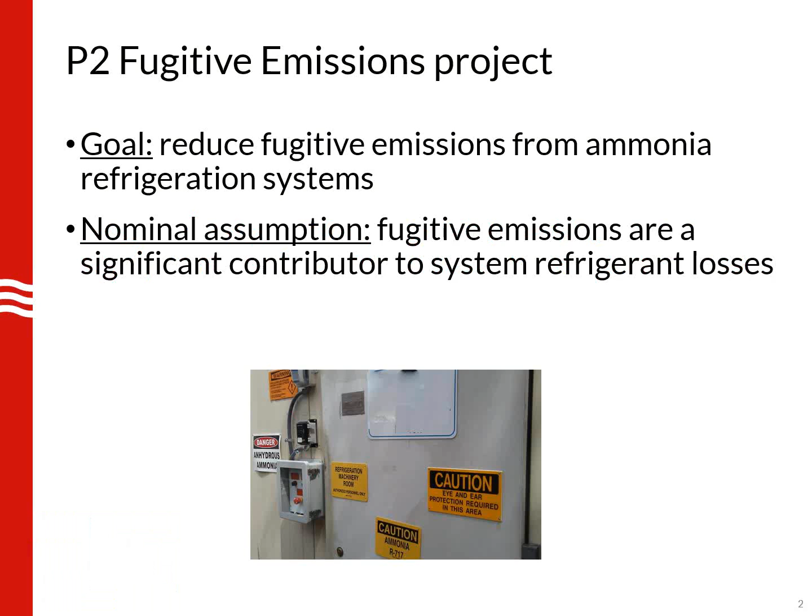We had a pretty simple goal at the outset of this project, and that was to reduce fugitive emissions from ammonia refrigeration systems. Our nominal assumption in establishing that goal was really pretty simple. We believe that fugitive emissions collectively were a significant component of the refrigerant losses that these systems experience on an ongoing basis. So that was what we might call our null hypothesis.

During the course of the project, we had several steps or phases in the work. The first thing was to establish some consistent guidelines for determining the refrigerant inventory for these systems. A lot of times the losses are expressed as a percentage of the refrigeration system's operating charge, or the inventory of refrigerant in these systems. Unlike a smaller refrigeration system that has an easily metered amount of refrigerant that goes in to allow the system to operate, it's not so easy when you get into these large refrigeration systems. I'll illustrate that as we get into the presentation.

We then moved to the laboratory phase of the effort. We wanted to evaluate different sorts of technologies that potentially could be used to identify where refrigerant emissions may be occurring from these systems. Then in the laboratory, we quantified what sort of leak rates we could measure in order to be confident when we went out into the field, which was the next phase of the project.

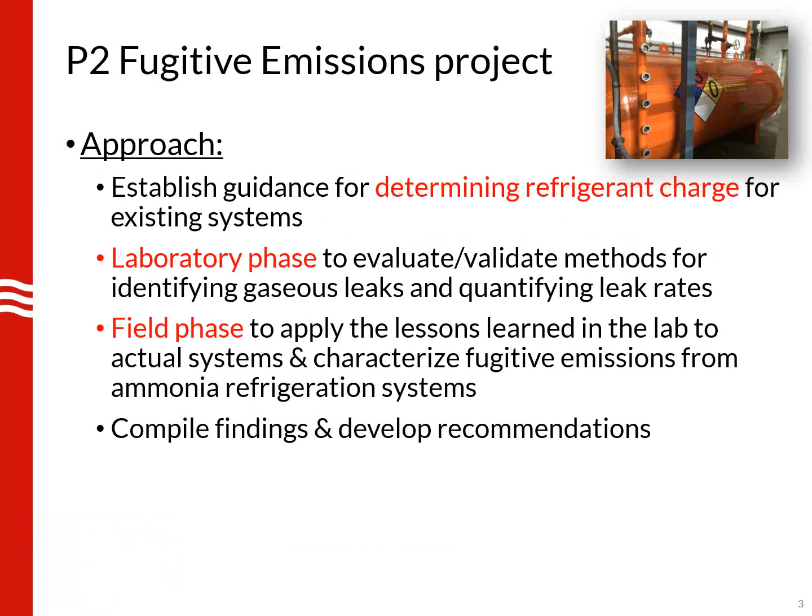We visited 5 facilities as part of this effort. We baselined the inventory of their refrigeration systems, and then we did a number of plant visits to identify and quantify fugitive emissions of refrigerant for those systems, as well as evaluating purchases for the past 3 to 5 years for each facility in order to try to match up the field data we collected on fugitive emissions with their actual consumption of refrigerant, and then compiling the findings and recommendations that we'll share, most of which with you today.

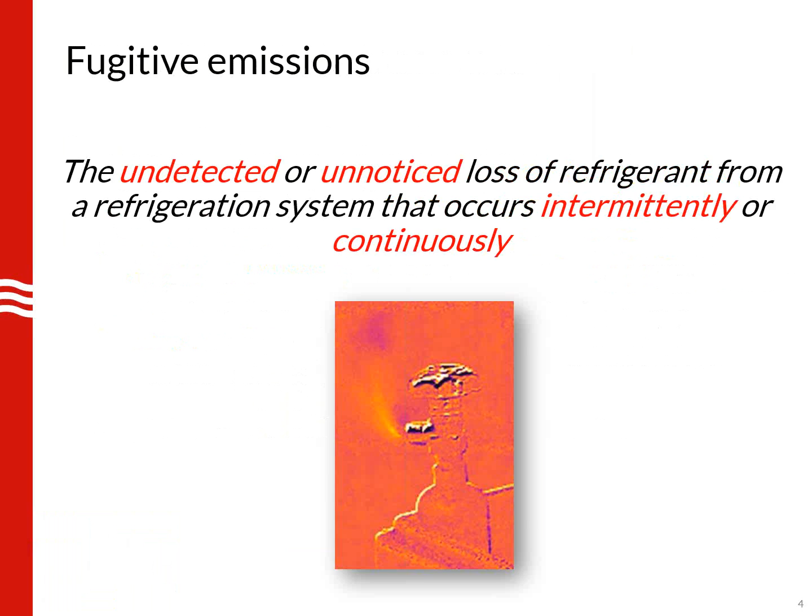So just to kind of level set, fugitive emissions are defined as those unnoticed or undetected refrigerant losses from these systems that can occur either on an intermittent basis or on a continuous basis. So that's a bit on the project and kind of what our goal and intent was.

Let's talk a little bit about the background. I know we have a pretty diverse audience here, so I want to give you a little bit of a sense of the background of the technology.

What is typical of refrigerant emissions. I found the survey results that a number of you responded to sort of interesting, so I'll show you that data. I'll touch briefly on how we establish what the operating inventory is for these systems, then we'll get into what strategies you can apply to reduce emissions and findings from our field work, and finish up with conclusions and recommendations.

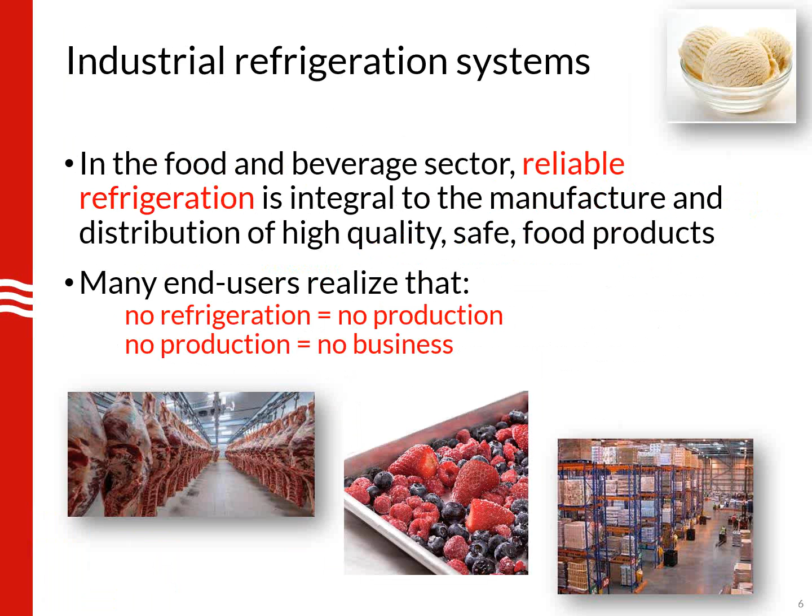In industrial refrigeration, the food and beverage sector really relies on refrigeration as part of their business. It's what I call the number one unlisted ingredient in food products. The end users that manufacture or store these products rely on refrigeration, and they realize that if they don't have refrigeration, they can't manufacture product, they can't package it, they can't store it, they can't distribute it, and all of that leads to no business.

So they value the reliability and safety of this infrastructure, and need it as a lifeline in their business. In the industrial refrigeration world, the refrigerant used by and large is anhydrous ammonia. There's a number of reasons for that. It's historical, it's been used for a long time. That was one of the first refrigerants used in the industry, and they never looked back.

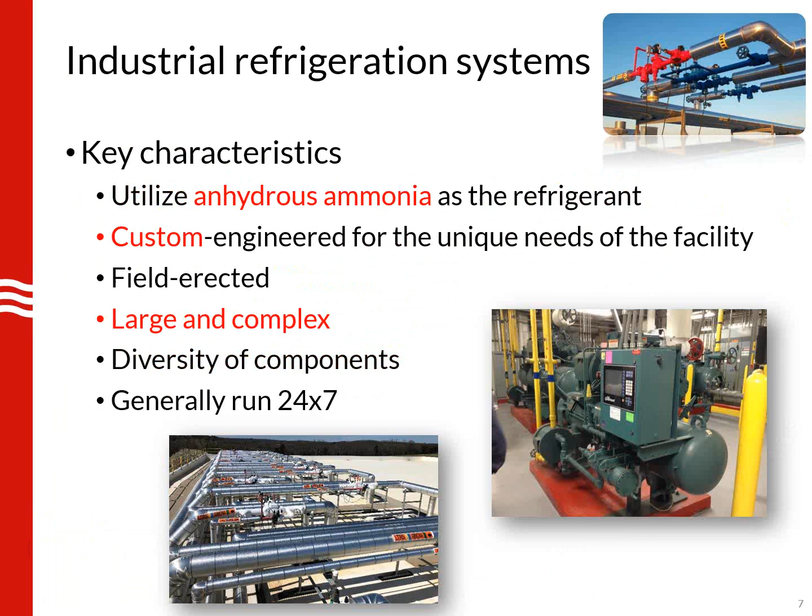These systems are custom engineered, which presents a number of challenges, and also makes it incredibly interesting. They're engineered for the specific needs of the facility, the process needs, the temperature needs for their manufacturing operations and storage. So these are all one-off systems, not something easily packaged and built in a factory and shipped to the job site. These are all field erected, large and fairly complex systems, with a lot of different components, and they run 24/7, 365. They virtually never shut down, because everybody needs to eat.

So why is ammonia used? We have a lot of different refrigerants that could be used in air conditioning and other types of refrigeration applications, but ammonia is ubiquitous in food production and storage because it's a really good refrigerant. It's efficient, has good thermodynamic properties, the cost of the refrigerant itself is low, and it's been recognized in the last 10 years or so that it has some very nice environmental attributes. It has no ozone depletion potential and no global warming potential.

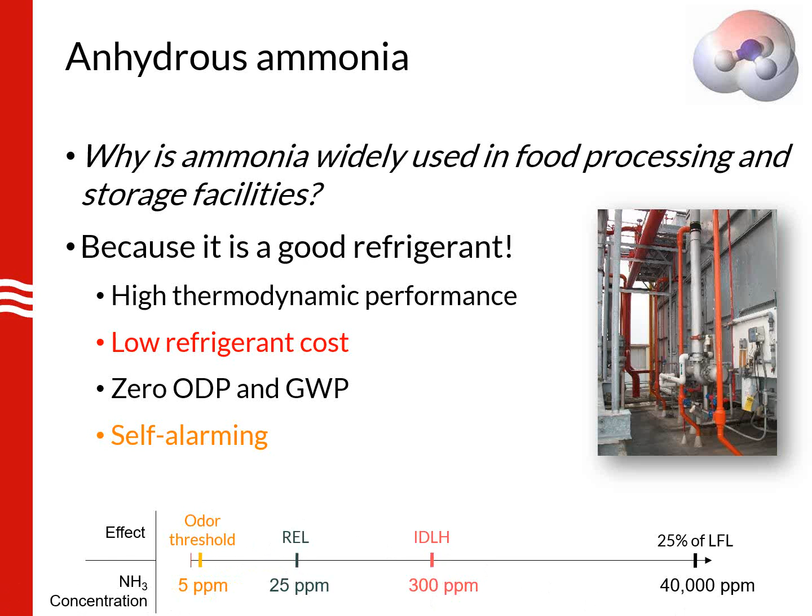Another hidden feature used in this project, and that some plants use, is that it's what we call self-alarming. What does that mean? That means you can smell it easily. Most people can detect the presence of ammonia at pretty low concentrations. It has an odor threshold of about 5 parts per million. Once you get up to about 25 parts per million, that's equivalent to NIOSH's recommended exposure limit. At higher concentrations, 300 parts per million is immediately dangerous to life and health. And at significantly higher concentrations, 40,000 parts per million is 25% of the lower flammability limit. So a pretty low concentration, and most people can sense that it's there.

So the scale of this infrastructure, in terms of how much ammonia circulates through the piping and all the components in these systems, varies really widely. We have small process systems and small applications like ice rinks that might use ammonia systems containing 500 pounds or less of refrigerant, maybe up to about 1,500 or 2,000 pounds.

Small to mid-size food or beverage processors might have systems approaching this benchmark of 10,000 pounds, which is a point of transition from a regulatory perspective, moving them into coverage by OSHA's Process Safety Management and EPA's Risk Management Plan programs. And you start getting into medium size food and beverage, which might be 10,000 up to about 60,000 pounds, including some modest size to large size refrigerated warehouses and distribution centers.

And then you get into the large and mega refrigerated distribution facilities. Those are in the range of 60 to 70,000 pounds, in excess of 100,000, 125,000 pounds. And then you get up into the very large process systems that can go above 500,000 pounds of ammonia in one system.

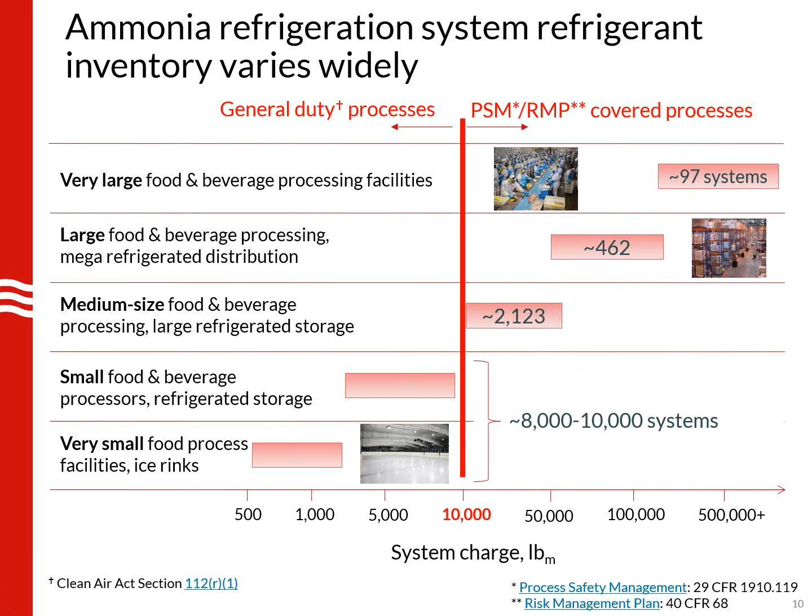The smaller systems that are below 10,000 pounds, there's no compelling filing requirement, so we don't have a very good count. Industry estimates there's somewhere in the range of 8 to 10,000 of these systems that are below that 10,000 pound threshold.

To give you an idea of the scale in terms of quantity of refrigerant used in these systems, let me touch briefly on a poll I sent out Monday asking people what they think would be a typical loss rate from these systems on an annual basis - what percentage of that system charge is typical. I gave you choices: 1%, 5%, 10%, 20%, and 30%. I know it's a diverse audience, so some of you may not be at all familiar with this, so I put in 'I have no idea.'

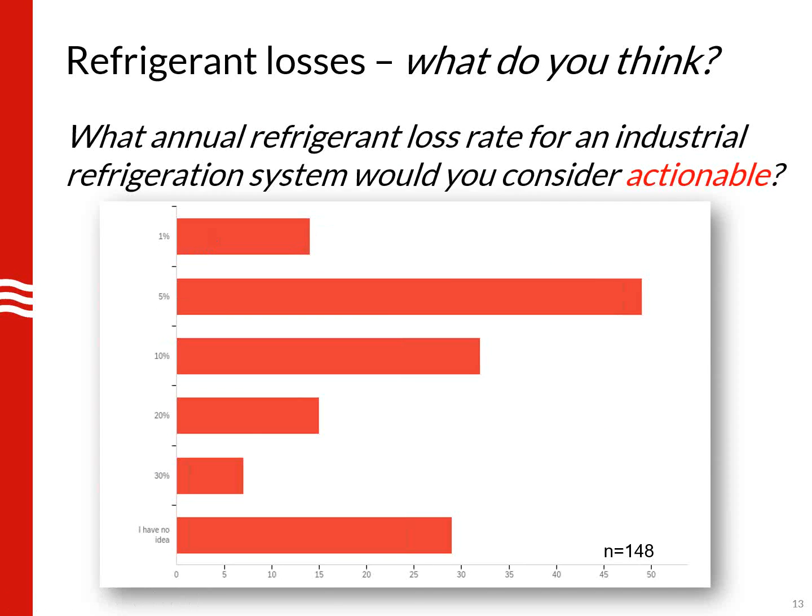This is what was interesting - I asked what would be a threshold for plants to take action if they exceed that limit. So if I'm losing more than X% of my system charge annually, are we going to get out and look for where the ammonia is going? What was interesting is you said the typical was 1% and the actionable was 5% of the system charge. So I guess the optimist in you collectively said we're doing better than actionable, right? If we're at 1% typical, no action required. Hold that thought, because we'll come back to that at the end of our presentation.

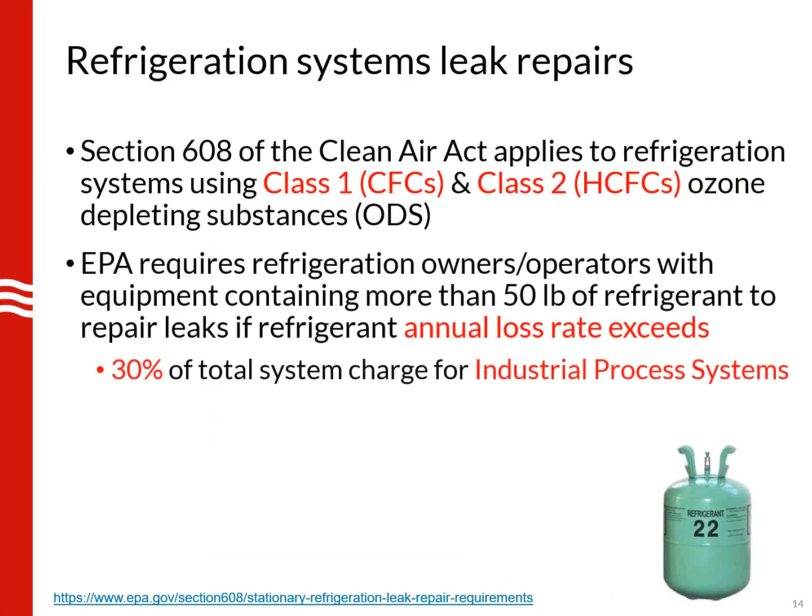To give you a basis for comparison, EPA Section 608, part of the Clean Air Act, governs what we call Class 1 and Class 2 refrigerants - these are ozone depleting substances. Any system that has 50 pounds or more of refrigerant and has annual loss rates that exceed these limits: industrial systems, 30% is the limit. EPA said if you exceed that threshold, you must go find and repair leaks. So think about that, 30%. For commercial systems it's 20% - these would be found in supermarket refrigeration applications. And for all others like air conditioning systems, it's 10%.

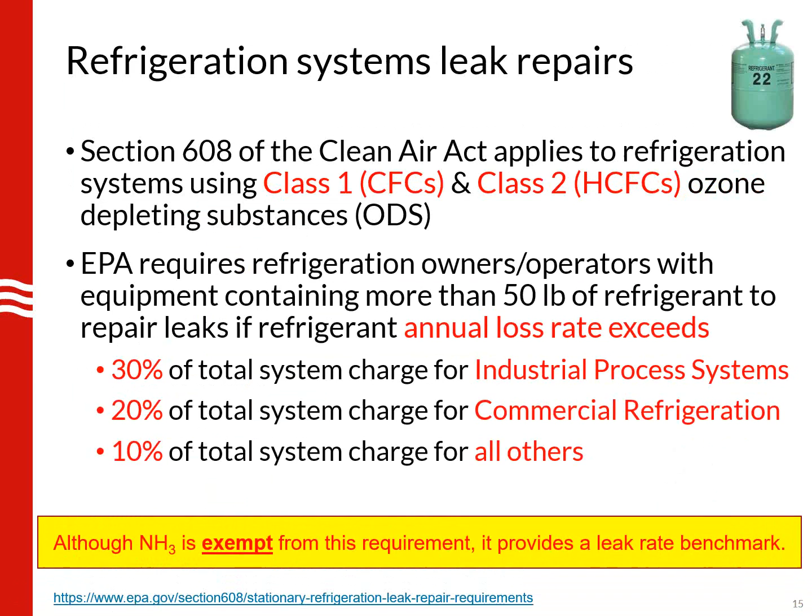But what's interesting is these only apply to ozone depleting substances. Ammonia is not an ozone depleting substance, so it's exempt from these requirements. The only reason we raise it is because this sets a bar at 30%. So if we had ammonia systems leaking at 30% as a routine matter, that would be a much different picture, and I think it doesn't match up with your instincts either.

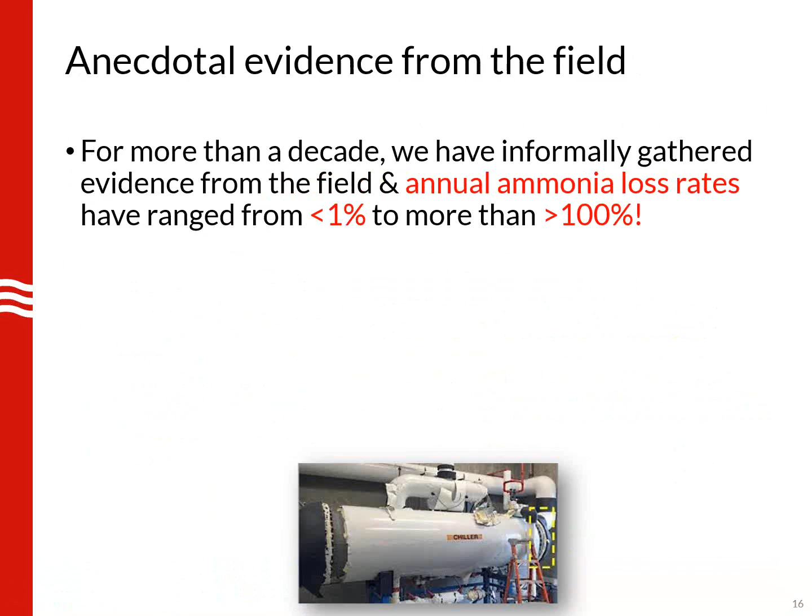Over the course of many years - we've been at this for a long time - we've seen plants that have leak rates of less than 1% per year, and we've seen plants that have had leak rates of more than 100% per year. That really was what drove us to pursue this project. We said, why is that range so wide? Where are these losses coming from? Is it fugitive emissions of ammonia driving this?

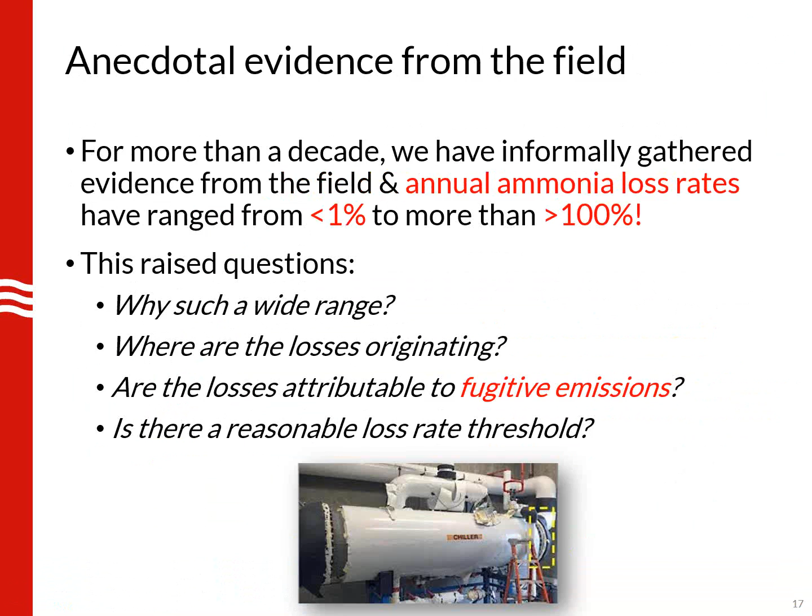What is a reasonable loss threshold, since there is no compulsory requirement from a regulatory perspective, like there was in Section 608 for ozone depleting substances. So the first step in this process is really baselining what is the operating charge or inventory of ammonia in a built-up refrigeration system for a given system. There are three general ways we can go at this.

One is we can do the engineering calculations, knowing all of the components that comprise the system and the state of the refrigerant in those components. We can go through and add things up, each component at a time, doing engineering calculations. That's what we did in this project.

We could also look at, if it's a new plant and they bring in ammonia and charge the system, we can add up the receipts for a new facility, but a lot of these facilities have been operating for years, in some cases decades, so we don't necessarily have that.

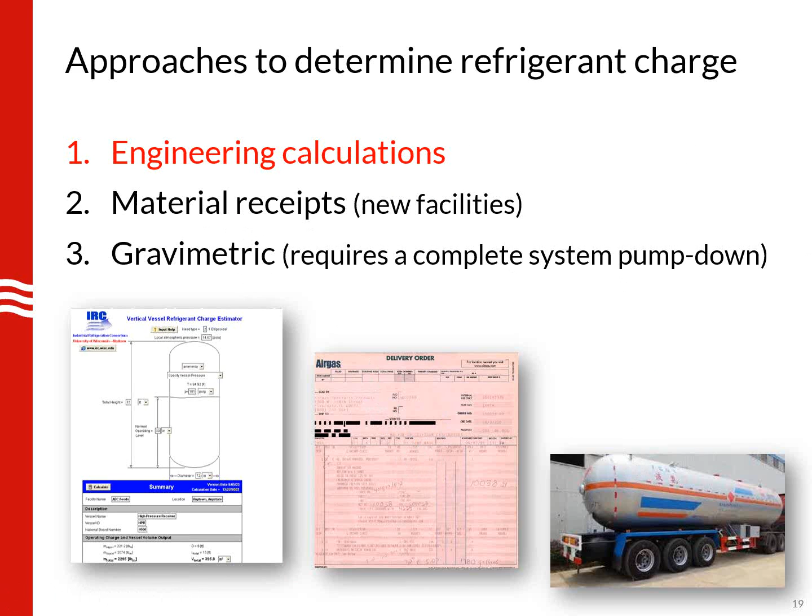You're not going to pump down a 500,000-pound system. It's going to take you a long time to get enough trucks, and you can't do it. So we're going to do the engineering calculations, and to do that, we evaluate the system, look at all the components, establish what the state of ammonia is in those components, knowing the properties of ammonia, the volume of those components.

We can multiply the liquid volume times the density. Liquid's the most important—it's the most dense fluid. Vapor is going to be fairly minimal in terms of its quantity. We sum up all of the individual mass of ammonia in each part of the system, and we arrive at a total system charge quantity.

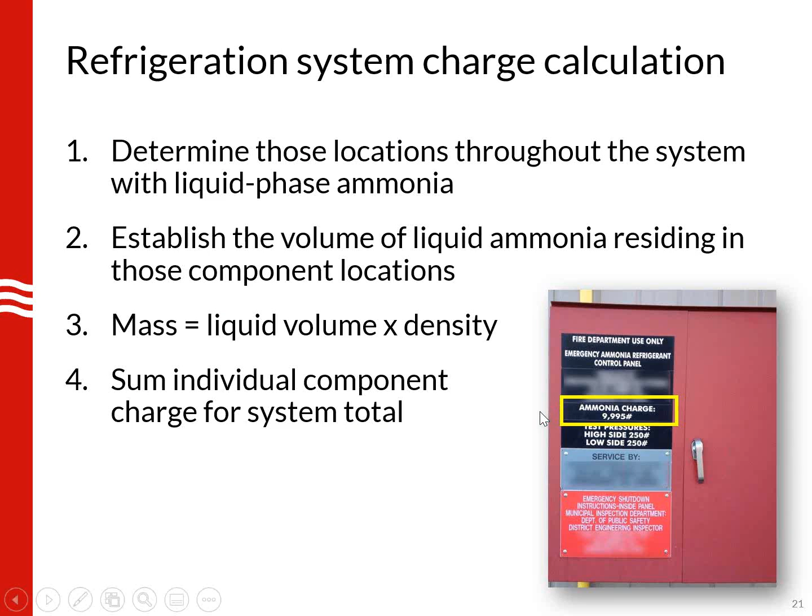Some of these plants will have a stated charge on a placard outside of the plant, and what we found is a lot of times the placarded amount doesn't agree too well with a detailed look at engineering calculations. So this information, and what I would say are the recommended practices for doing these inventory charge calculations, we've memorialized in this guidance document, and this will be one of the pieces of information made available at the conclusion of this project.

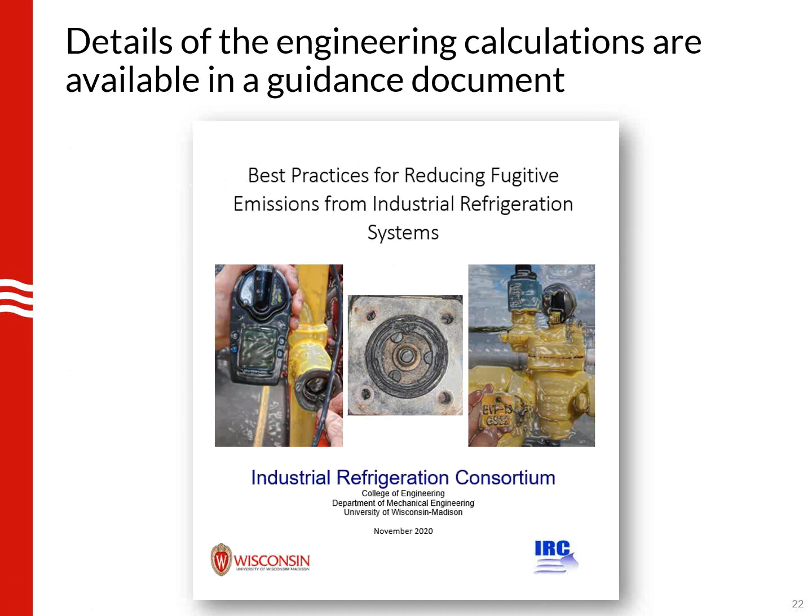So in addition to talking about the best practices for identifying and reducing fugitive emissions of ammonia, there are details that go into the charge calculations. Given that we only have an hour today, I apologize, we're not going to be able to solve any ordinary differential equations or get into a lot of math. That information is in the guidance document, and we've compiled tools that would allow you to actually do these calculations without going through all of the math.

So there's a handful of tools that we produced and are available for you. A charge calculator that will let you determine the inventory in pressure vessels, whether horizontal or vertical oriented, heat exchangers like evaporators, and also compressors. Each of these are standalone tools to calculate the quantity of ammonia in those individual components.

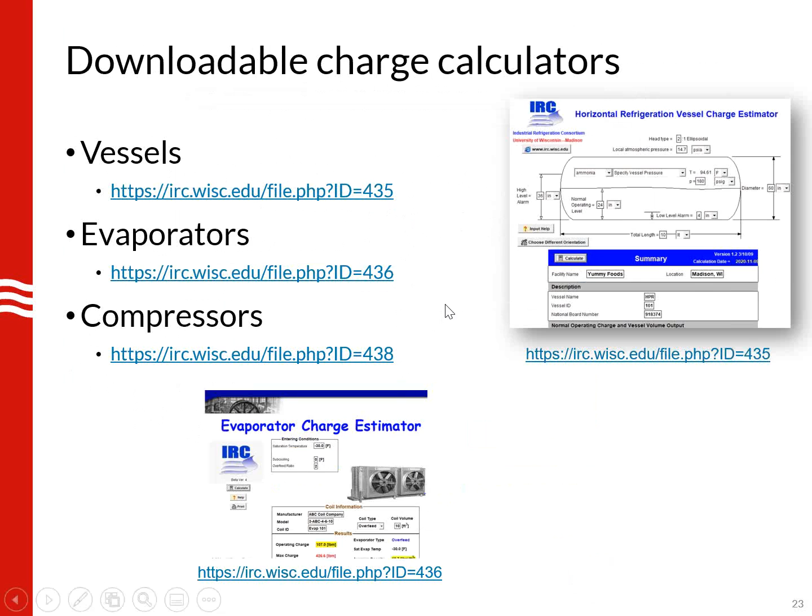And then we also have an integrated tool that is web-based that does the same thing, and it brings in piping too, letting you calculate the quantity of ammonia in piping and do those calculations for each of these components. This will add all of those subsystems together to come up with a total system charge or inventory estimate.

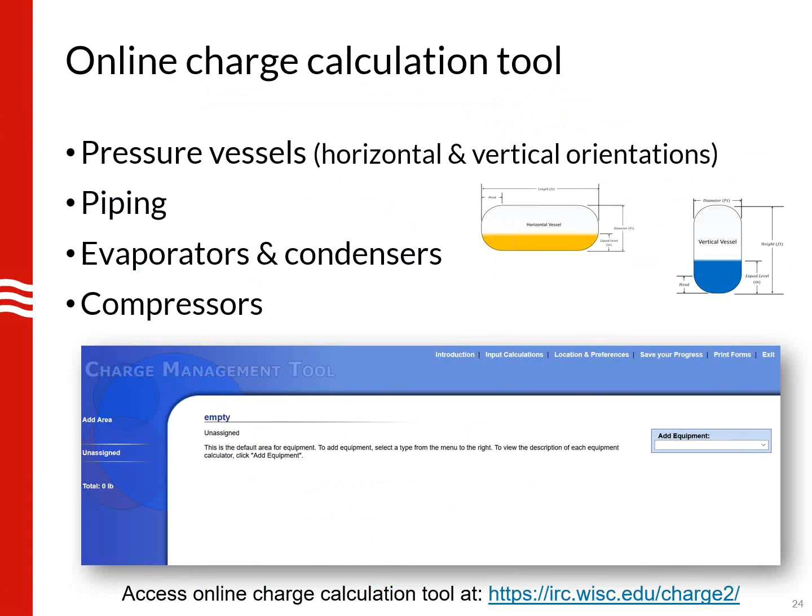So those will be available at the links, and I think what I'll do is at the conclusion of our presentation today, I'll send out the PDF of this presentation and you'll have those links. I know that EPA will also have this available on their website, the presentation. So that gives you a little bit of background.

So I want to transition now into the strategies that we applied for finding these fugitive emissions in refrigeration systems. And I'm going to turn it over to Mark.

Thanks. So when we first went out into the plants, one of the main goals was to find leaks. Typically, how leaks are identified in these systems is through an odor report. Either utility staff, other plant staff, or contractors will smell ammonia, they'll put in a report, and then the report will be investigated. Once it's investigated, they'll pinpoint the source with either a sulfur stick, litmus paper, or some other means, and they'll repair it and go on.

Ammonia detectors, either handheld or fixed, are typically used for either an early warning of a larger release or emergency response. A handheld might be used to monitor room concentrations, and at a certain point that'll direct how the emergency response goes. Fixed detectors are found in machinery rooms, penthouses, and other spaces, and they'll alarm at a certain concentration of ammonia.

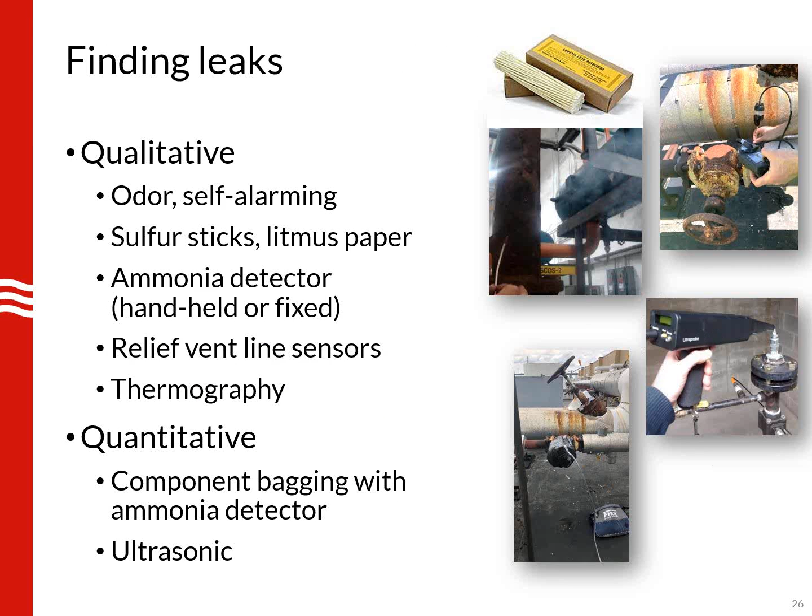Quantitative means of looking for ammonia leaks would be bagging, which we'll talk about next, with an ammonia detector, or ultrasonic, using an ultrasonic detector to pick up the ultrasound generated by fluid flow, and then taking a dB or sound power reading from that flow to estimate the rate.

So on to bagging, or screening first. In screening, we'll take an ammonia detector, preferably with a pump built in. This particular detector moves about a cubic foot per hour. You get the tip of the probe as close to a potential leak site as possible. Sometimes it's not possible to go directly against it because of grease or accessibility, but as close as you can get, and you move along the leak site and monitor the screen for a detectable amount of ammonia, which reads out in ppm.

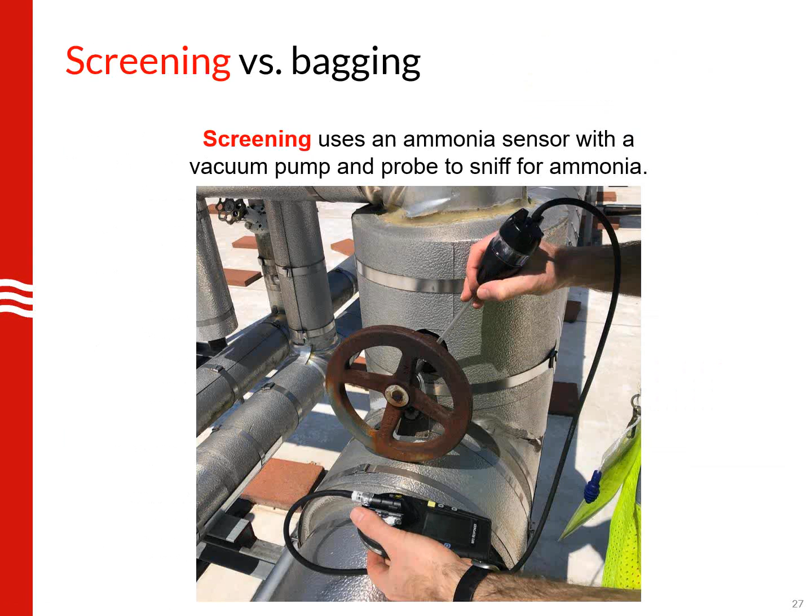What we found is even when there's no odor present, you could detect leaks through this means well below the odor threshold. It takes a little moving around to find the peak point, but you can find very small leaks.

And then to actually quantify the leak in a more accurate way, we can encapsulate the leak site in a bag. In this picture, it's a fairly large bag covering a flange, a valve stem, and everything else. You could also make smaller bags over individual components—it's really up to what you're looking for. But the purpose of the bag is to encapsulate the leak site, and the goal is to move air from outside the bag into the bag.

So what we'll do is either leave the tape on the right side loose, or put some holes on the right side to direct air through the bag over the leak site, and then pull it either through the ammonia detector sampling pump alone or through an external vacuum pump. By knowing the flow rate of the air and the concentration of the ammonia, you can get an accurate calculation of the leak rate.

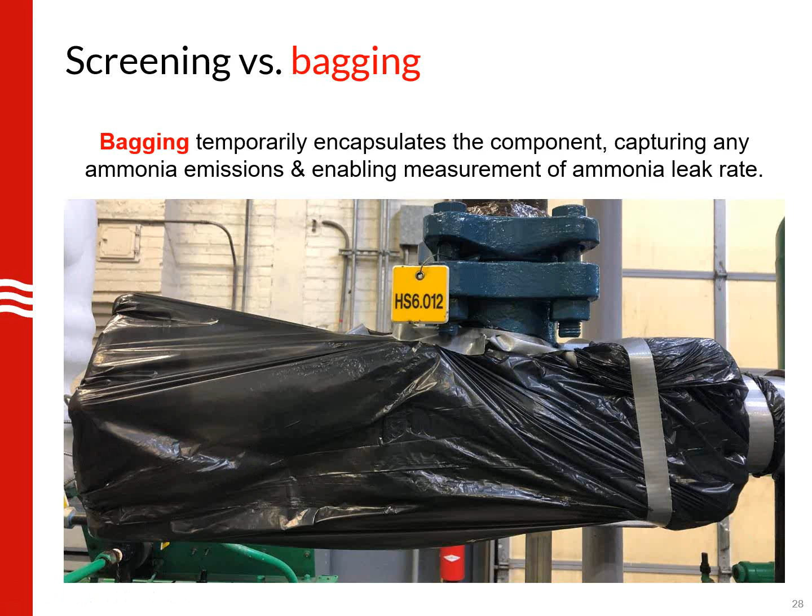So what we found is the most effective means of finding these releases is what we've been doing for the last 100 years, which is odor reports. Typically, we found that even fairly small leak rates are able to be smelled if you're passing by.

And then some areas are not often passed by people, so you could do periodic screening of potential leak points that are high up. You could maybe put an ammonia detector on a long stick and monitor those areas, looking for concentrations. What we found is not particularly effective is ultrasonic.

The amount of fluid flow required to get a reading on an ultrasonic detector is fairly high. It works well for things like air, but when it comes to ammonia, you're much more likely to smell it long before you'll be able to get a reading on an ultrasonic detector.

Infrared thermography suffered from somewhat the same problem. In order to actually see that gas escaping in the thermal image, it took quite a bit of gas—you'd detect it by other means before the camera would.

And then relief line detectors—they are excellent at detecting when relief valves open, but since they usually don't start picking up concentrations until around 3% of the lower flammability limit, which is well over 4,000 ppm, a leaking seat typically won't be picked up by that type of sensor.

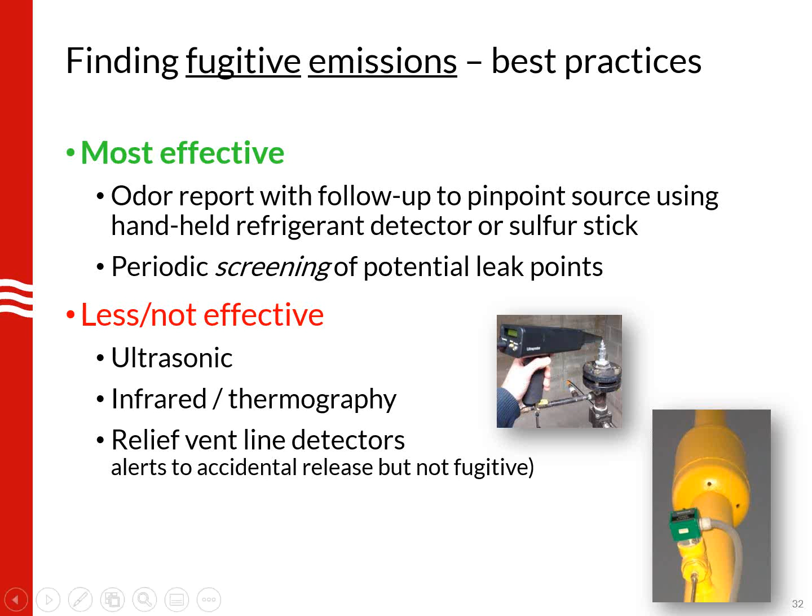So what we thought is a good way of estimating a release rate, per section 608 and just common sense, is how much are you putting into the system. But a lot of systems will only put in ammonia every 3, 5, maybe even more years. So are we able to track the amount of inventory or charge of the system in between those fills?

If the level gets high, there will be no incoming liquid to that vessel. It'll be stopped. And if the liquid level becomes low, more liquid is going to be put into that vessel. So if you track the average of that vessel, it's going to be constant.

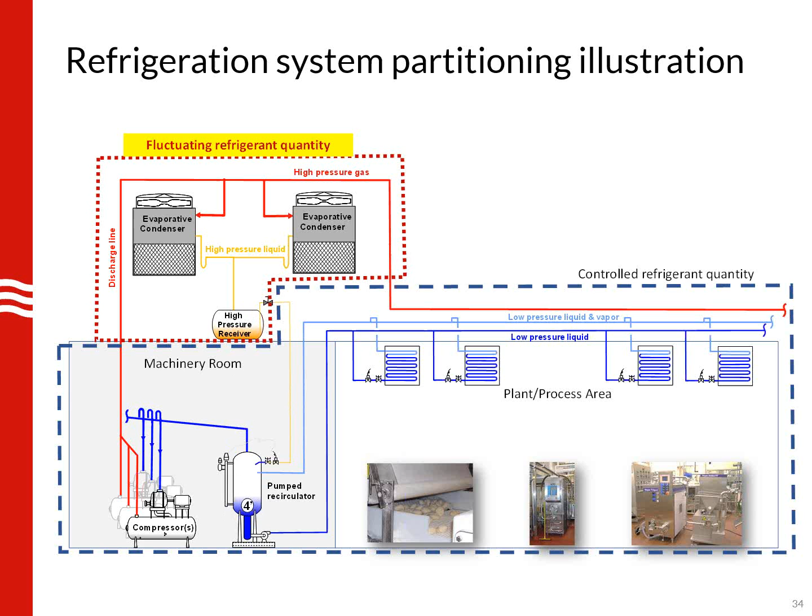And it turns out that the answer is typically yes, and you can actually make a tool to help track this. So this tool is, you'll take the vessel, and this could be more than one vessel, but in systems it's often just one vessel, and it's often the high pressure receiver.

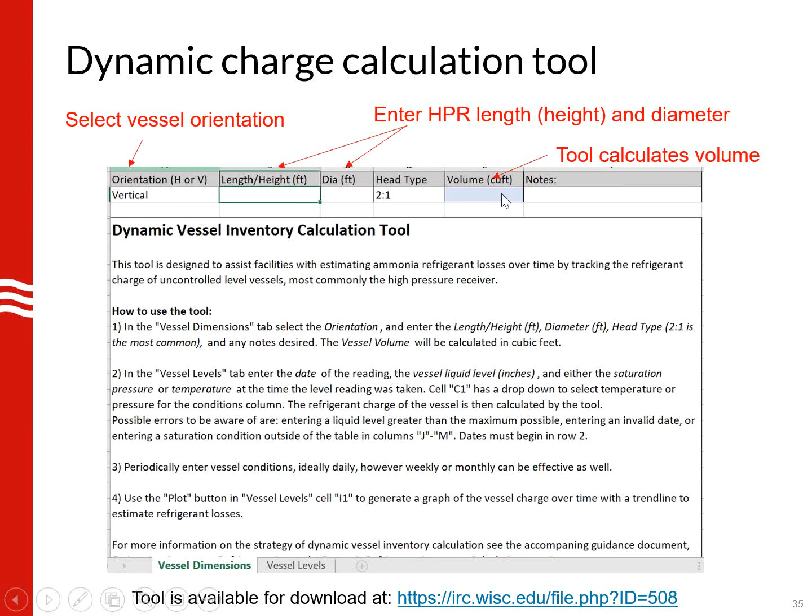And all you have to do is put in the orientation of the vessel, horizontal or vertical, the dimensions, and the head type. 2:1 is the most common in this industry, but there are other options as well, just in case it's different. And then once that volume is calculated, you can move on in the tool. This is in Excel, by the way.

You can move on to the next page, which is the vessel levels. And there it can input vessel level readings. You can input the date, the liquid level in inches, so that would be from the bottom of the vessel, and then either the saturation pressure or saturation temperature. You can pick which one you want to use.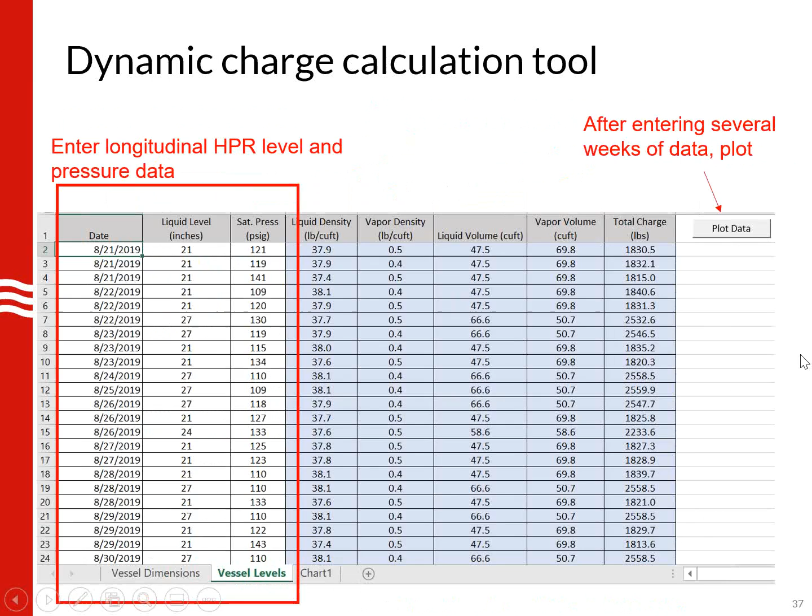And so multiple instances can be used for any one date. You can put in multiple readings on a given date. You can skip dates as long as you go from line to line. Then once all the data is in there, you can push a button to plot it.

And the plot that appears, it'll plot the raw data, which as you can see is kind of a scatter as things change, but it also plots a trend line of that data. And in this case, you can see that the trend line trends down at an average rate of 1,100 pounds per year. And you can also see the equation for the line, and the last number, the intercept, isn't important, but the slope of the line is the daily loss projection.

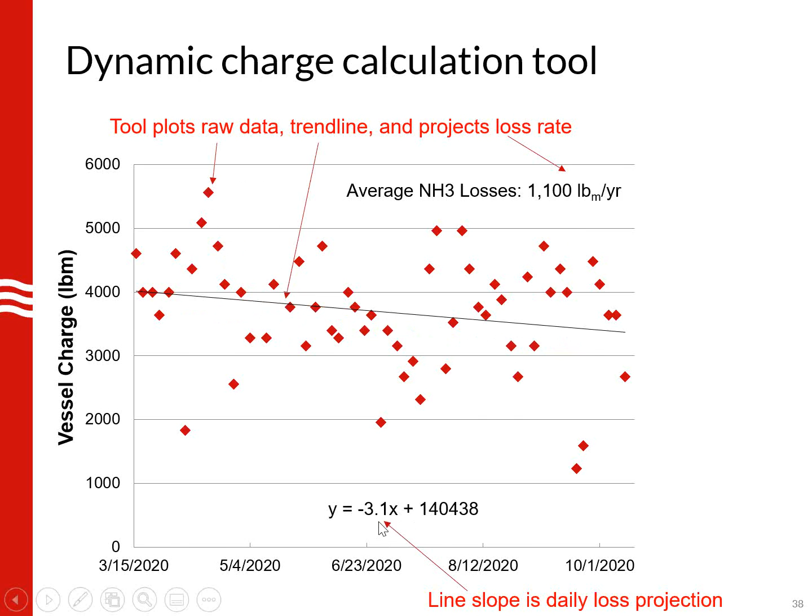And so what we found is if you plot over a large period of time, you can get a decent estimate. So in this case, this is plant one we used. You can see the date range 2017 to 2018, and you can see a smooth trend downward.

And that's because this plant, in their log sheets, for one log sheet, it would cover about a week. And so in this case, in order to input this data, we averaged the dates and the levels for each log sheet. And what you end up with is this trend downward.

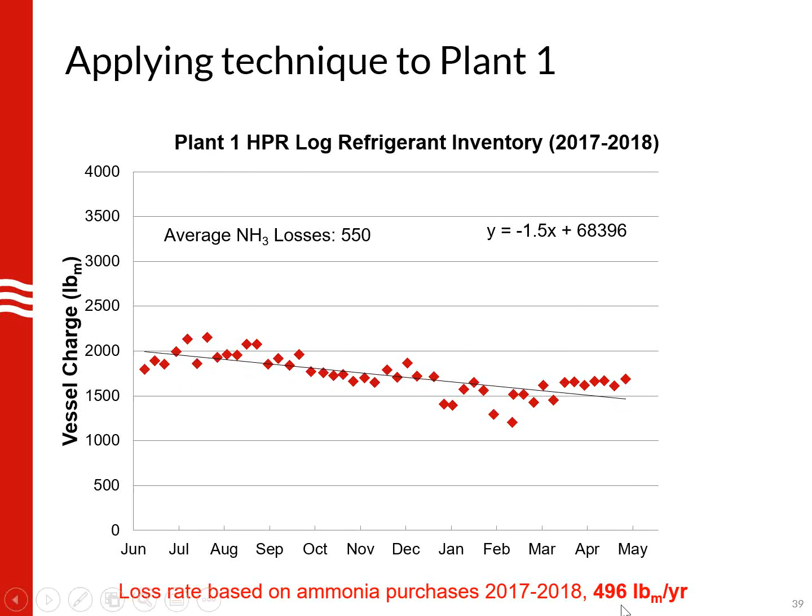And the average losses of this trend were 550 pounds, and their purchase rate is about 500 pounds per year. So you can see that this vessel actually tracks pretty closely with the actual purchase rate and the actual losses.

So for this same plant, you can see now we're in the 2019 to 2020 range. And in this case, the vessel doesn't have a level probe, it only has sight glasses. So each time they do rounds, they log the number of sight glasses that have liquid. And the liquid is apparent because of the very dark sight glass.

And so what you end up with is a lot of readings at the same level. But as they start to lose ammonia, they start to see more and more instances at a lower sight glass level. And so you can see that it still trends downward. It's essentially the same as averaging each page, except this is individually entered.

And you can see that their loss rate has actually gone down from about 500 pounds a year to less than 400 pounds a year. And whether this could be due to a few reasons, it could just be that less maintenance was done in that time, but it could also be that emissions were reduced, because in this time they actually removed a room's worth of evaporators and replaced it with a single unit to cool the whole space.

And they were having mechanical integrity issues with those evaporators, so it's possible the maintenance and losses from those has gone down. And also they've been acquiring newer valves in the system, as they were having some problems with emissions from those valves. So as they solve those problems, it could reduce emission levels as well.

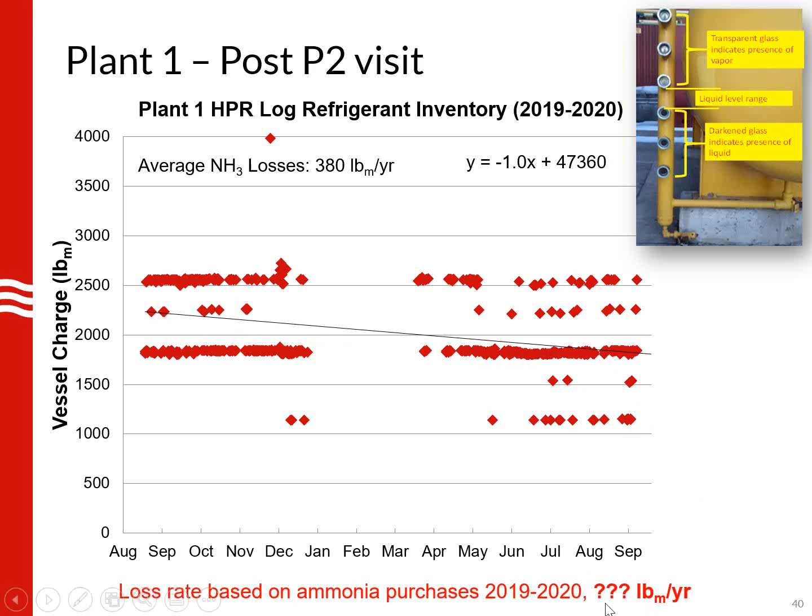But we'll have to see if the trend continues. They aren't due to purchase ammonia for another year or two. So it's a positive sign, but it doesn't really prove anything, but it is a good sign.

A caveat of the dynamic charge tool is you have to consider how the system operates as you go. If you run into a situation where you start tracking and then a large part of the system goes offline, you'll probably trend upwards because that offline portion's ammonia is going to end up in the high pressure receiver, giving an upward trending line. Or in reverse, if you start trending and then turn on a large part of the system, you'll get a much steeper drop, a steeper slope downward than the actual losses. So you have to keep those system fluctuations in mind as you do this.

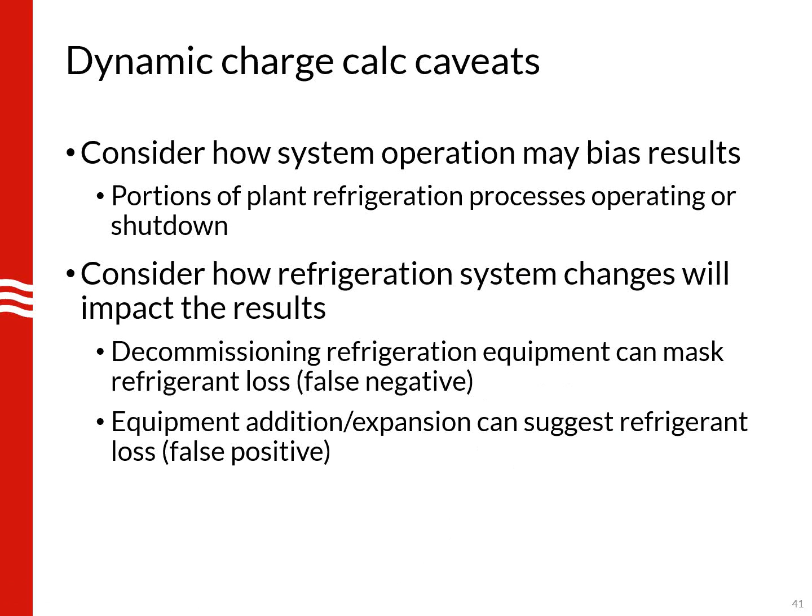And if you expand the system or take things out of it, you have to start a new sheet because the operating charge of the system will change pretty dramatically. A small tweak probably won't have an effect, especially if the high pressure receiver is fairly large and full. But generally, if you're going to add or subtract equipment, you have to start tracking anew.

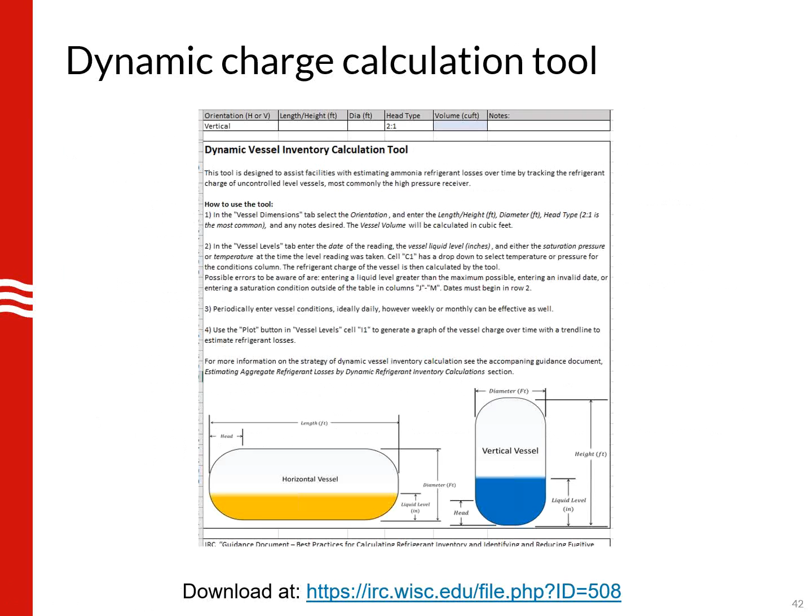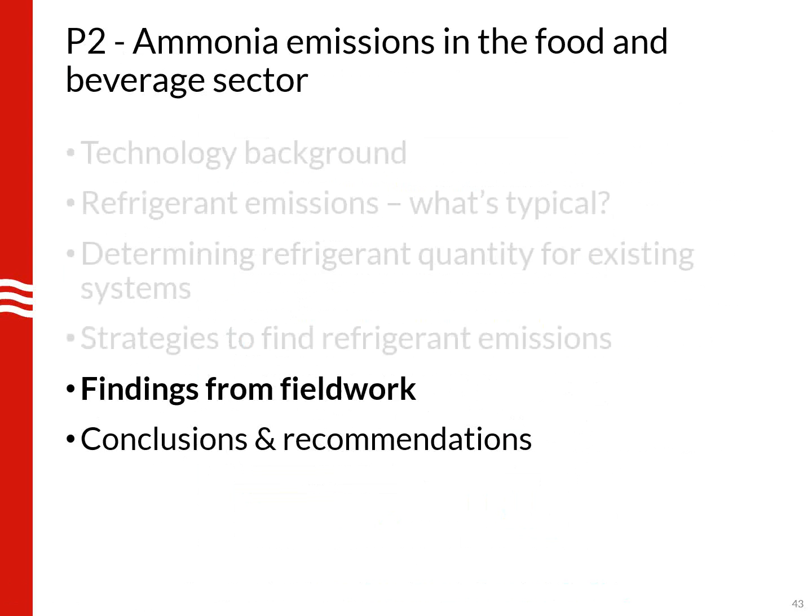So that gives you a sense of what we can use as an independent means to identify whether we have something going on. It's a lagging indicator because we're looking at trend over time, but it's a much shorter time lag than a plant would typically utilize - that is, hey, we're running really low on ammonia in our high pressure receiver, we need to add refrigerant to top it off. So we're encouraged by the initial findings of this tool as a shorter lagging indicator than what would typically be used in plants.

In plant 1, they were losing on average 500 pounds per year, which translates to about 7% of their system charge. Thinking back to the initial survey question I asked you about a typical percentage loss, here's some data that goes along with that.

Plant 2 is a slightly larger system, 15,726 pounds. They were losing at a higher rate, 2,369 pounds per year, or about 15%.

Plant 3, the largest system we looked at, 38,712 pounds. If you remember those larger than 10,000 pound systems on that horizontal bar chart, if you averaged all the RMP ammonia refrigeration processes - those systems primarily in food NAICS codes as well as refrigerated distribution - the average charge of those systems is 40,000 pounds. So this is very near the average. This particular facility annually purchases about 1,838 pounds, or about 5%.

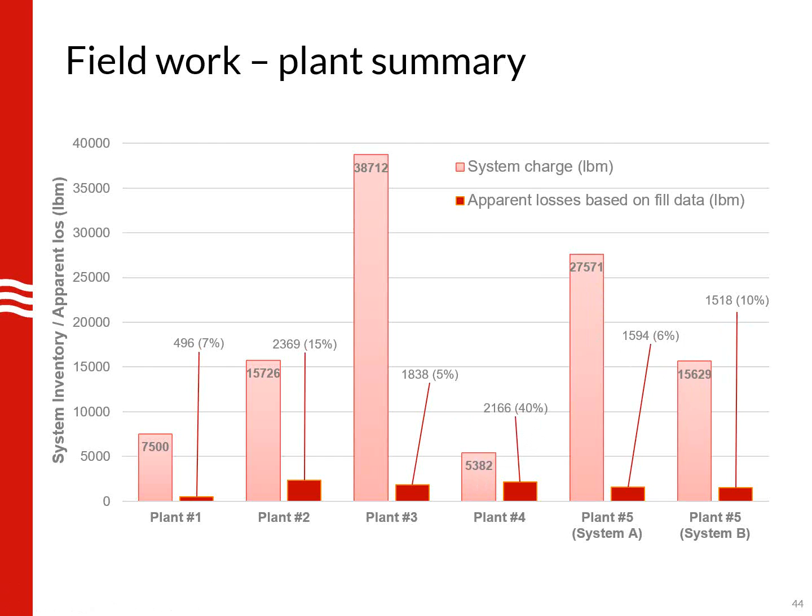So Mark, what did we find?

When we went out into the field, our first order of business was to prepare those charge calculations that Doug just went through. We measured all the piping, all the vessel levels, all the evaporators, and came up with those calculated charges.

Then we went out to try and find leaks. We surveyed about 175 components, screened 159, and bagged 110. Some were just screened, some just bagged, and some were both, so that's why the numbers don't exactly add up.

But in the end, that's what we ended up doing. We tried to get a wide variety of items, from valves of each type we could find, sight glasses, threaded connections, unions, different types of fittings, relief valves, pumps, and the purger.

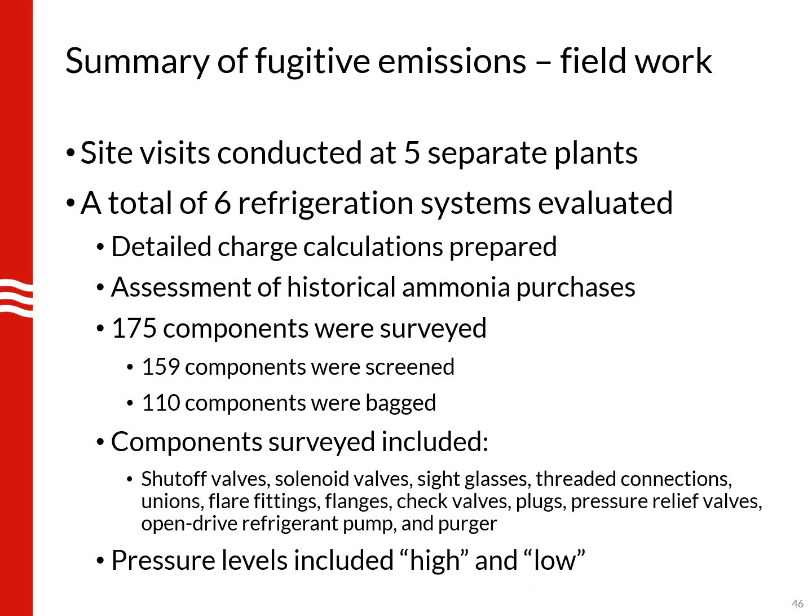We divided them into basically two pressure levels, high and low. High just means the pressure at which heat is rejected to the ambient, and low means pressures serving refrigeration loads. We set the demarcation at about 80 pounds.

So a summary of the field findings: of those 175 items, only 34 had any detectable emissions. Most of those were sight glasses, a few were valves, and we had one compressor housing.

If you've ever seen one of these compressors, it's usually made up of multiple parts bolted together. This particular leak was found at a gasket where two of those parts are bolted together on the end of the compressor housing. We didn't find any refrigerant emissions from these other components.

We know that these components do exhibit leaks, but during the survey, we just didn't find any from those. I mean, they do leak, but they weren't identified in the survey.

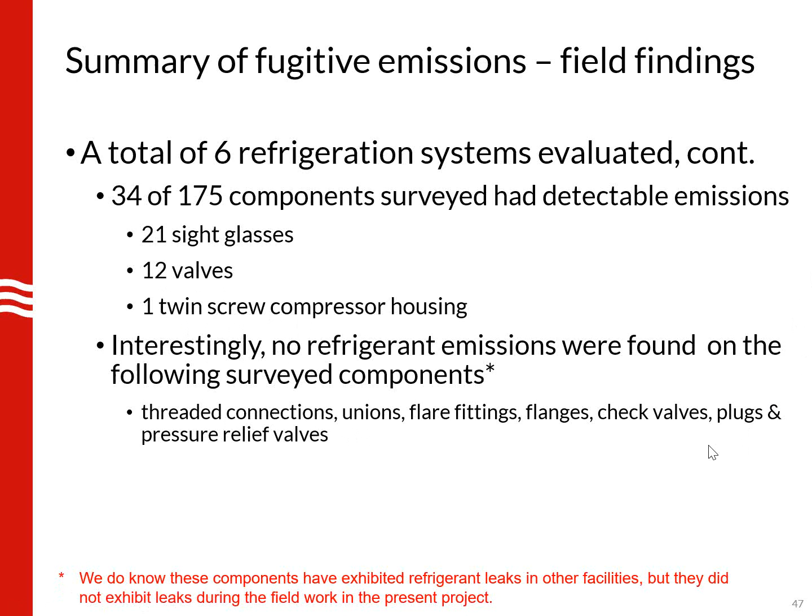So when you add up all those, the 175 points and the 34 leak sites, the average leak rate in pounds per year for things triggered by an odor, where a smell was found and the leak site was pinpointed, was only 1.25 pounds per year. If you take all the components sampled, the averages are 0.06 of a pound and 0.002 of a pound per year. No low side components were found triggered by an odor.

So one thing you might notice about those numbers, as Doug will talk about, is just how small they are.

Yeah, that was a little bit surprising. You might say, well, how do you measure things that are 0.002 of a pound a year?

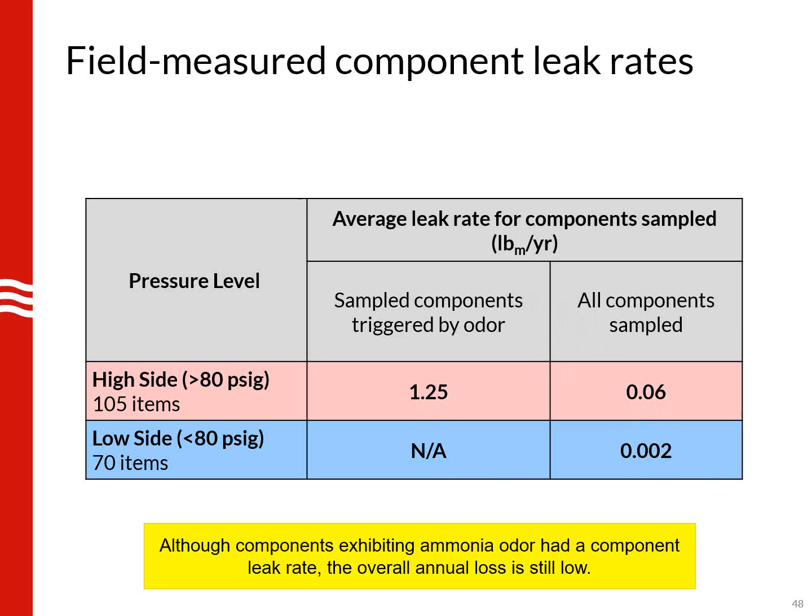The techniques used as part of the field exercise and the laboratory work that preceded it can measure pretty low concentrations. So this was a bit surprising for us.

Hopefully you go, wow, okay, well, the good news is, Mark, remember he said 34 of 175, so we didn't go out and find ammonia blowing out all over the place, which was good.

But remember, our null hypothesis was that the quantities of ammonia these plants are purchasing is due to fugitive emissions. They just don't know. There are valves weeping outside up on the roof, and collectively they add up.

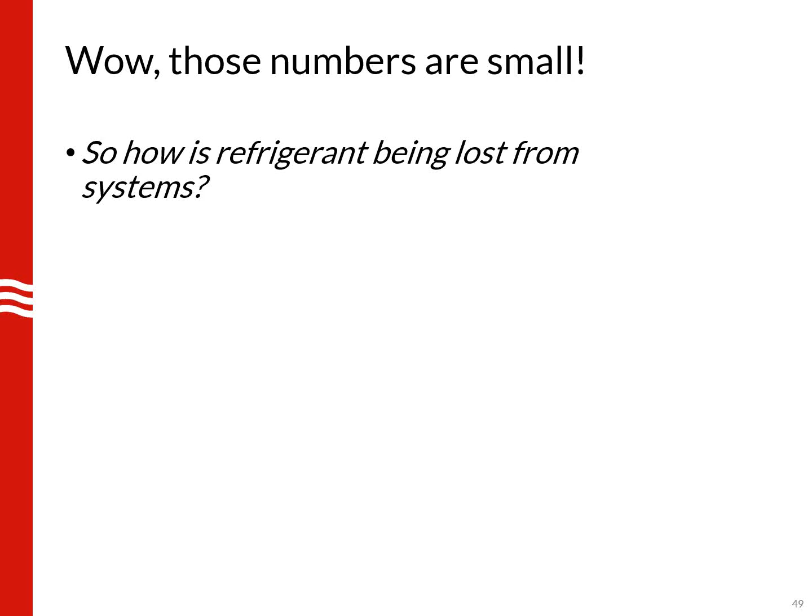Yeah, they do, but they don't add up to thousands of pounds a year. So what's going on? Where is this refrigerant being lost?

So we kind of had to back into it, and this is our follow-on belief now. If you think about the refrigerant that's lost from these systems, we put it into two major categories and then two minor categories.

Known losses, but known intentional and unintentional. An example of a known intentional loss would be venting.

It's pretty routine for these systems, as part of maintenance activities, when pumping down a part of the system to open it up and do inspection, service, maintenance, repair, or replacement. They need to remove the ammonia, and they commonly do that by venting the vapor to atmosphere.

If there's liquid or residual vapor, or if they're in a location where they can't vent to atmosphere, they would typically vent that ammonia to a water tote. The water readily absorbs the ammonia, and then they would treat that aqua ammonia solution.

In the known category, but unintentional, these are accidental releases. Typically, they're attributed to loss of mechanical integrity—a pinhole leak, a crack in a pipe, a crack in a connection, a gasket failure—something where they've lost the pressure boundary of the system and now have an uncontrolled leak. They know about it, but it was unintentional.

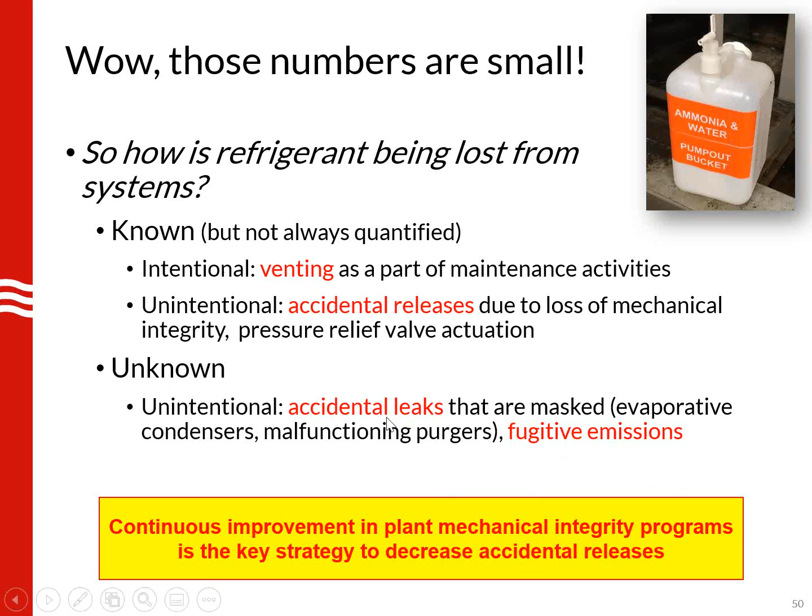And then lastly, the lowly fugitive emissions that Mark showed you how low the rates are. So if we're going to reduce the losses from these systems, it's really keying in on what we know, and also paying attention to these accidental leaks that we don't know. The fugitive emissions, we can tighten things up, but that's not really where the action is.

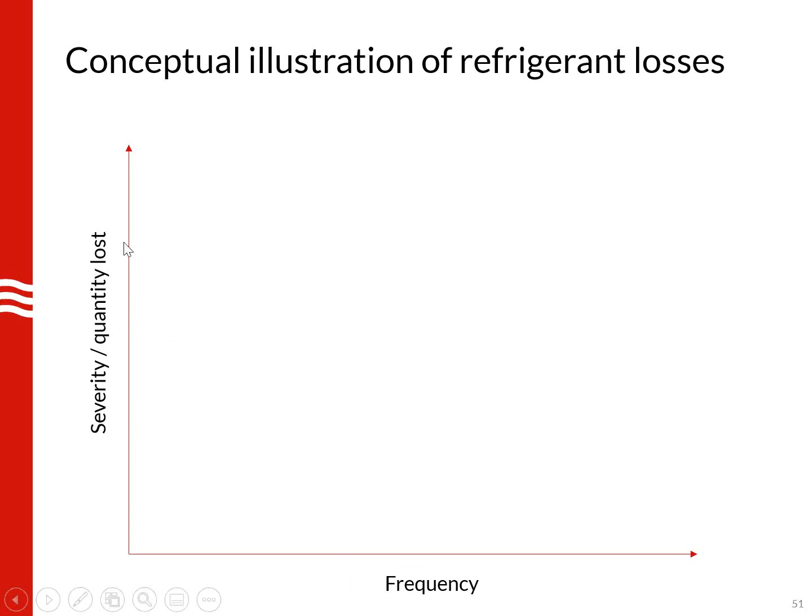So to put this into context, this is a bit of a cartoon, but we thought we'd structure it in terms of severity, or the quantity of ammonia that's lost, and then the frequency at which that occurs. So this has elements of a risk matrix, like what we'd typically use in a risk matrix.

So the large scale accidental releases, we can lose a lot of ammonia in those events. Fortunately, they don't happen with great frequency, but when they do, they're significant.

These more modest leaks, where we have an accidental release, a cracked fitting, a broken nipple on a piping segment, happen with somewhat greater frequency, but they're fairly quickly controlled at the plant level, and so they still result in a loss that we would want to prevent.

The maintenance leaks, this is the venting and the purging. A lot of systems, depending on the activity they have in maintenance and repairs, equipment replacements, expansions, this will vary based on facility, but for most facilities undergoing some change, especially process plants, there's a lot of work going on in those systems, and there's venting and losses associated with that.

And then fugitive emissions are way down here in the weeds—small rates, high frequency. They total up into the tens of pounds per year, maybe for a plant. A large plant might be 100 or so pounds a year.

And then, I think we've done a good job in the industry at controlling this last one, and that's theft. We had a pretty big rash of this 10 or 15 years ago. I think it's sporadic now, and that's the stealing of ammonia from these systems. You're kind of thinking, stealing ammonia? What the heck are we stealing ammonia for? Well, there are some people that value the ammonia for clandestine operations like running meth labs.

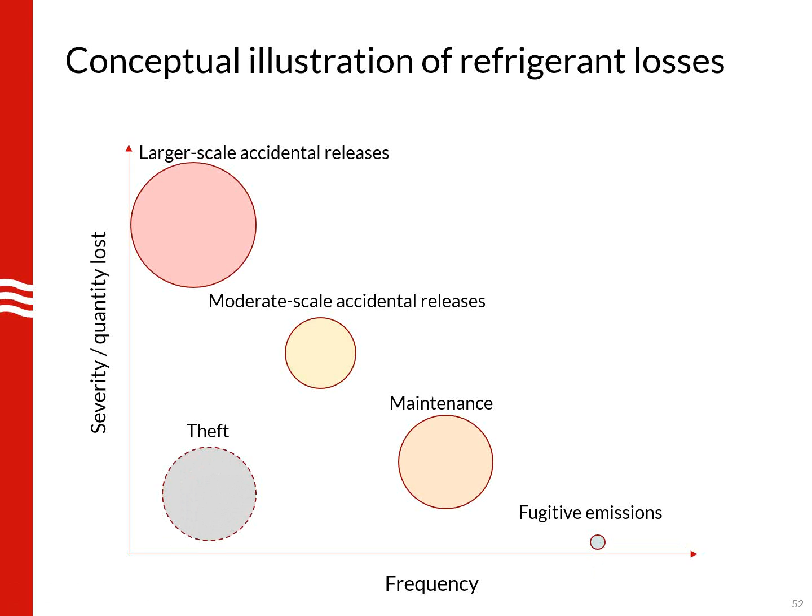So in some cases, where portions of a system are accessible—these are largely in rural areas—people can come on site, find a connection, hook up, and away they go.

So one of the big emphases, I think, the take-home from our perspective, is reducing these accidental releases that are rooted in the loss of mechanical integrity. I think that's going to be a big lever to reduce the consumption, to reduce the releases of ammonia.

And that is making sure we're doing inspections, tests, maintenance, and retiring equipment before it fails. Plants covered above this 10,000 pound threshold, covered by OSHA's Process Safety Management and EPA's Risk Management Plan programs, are compulsorily required to have mechanical integrity programs.

So I think we're getting better at that, and we have some tools and resources enabling plants to make continuous improvements there. When they have strong mechanical integrity programs, the probability of those accidental releases goes down. That's good news for the plant—they're able to run more effectively with less disruption.

I would point out that both from a regulatory perspective—OSHA's National Emphasis Program and EPA's National Enforcement Initiative—that have done a number of inspections in ammonia refrigerated facilities, I would say the number one cited element in terms of deficiencies is mechanical integrity.

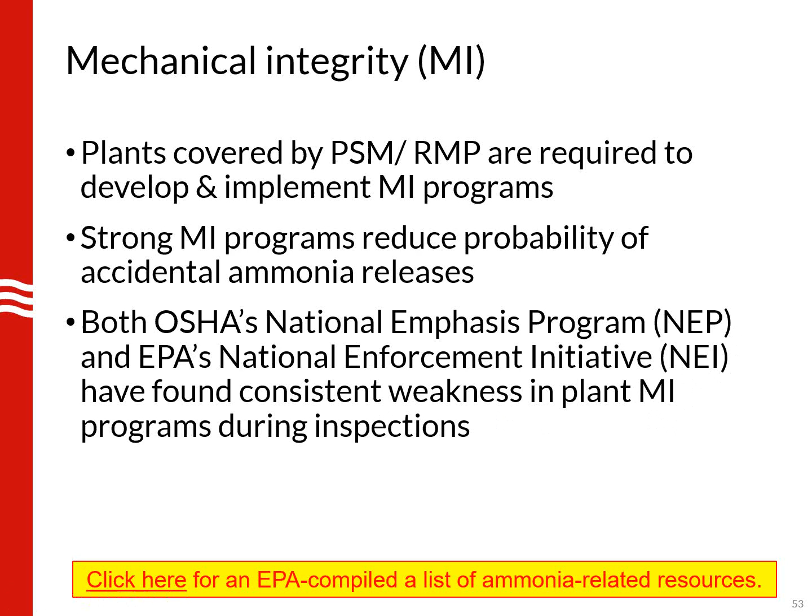And we have good data on that over a longer period of time from OSHA. I think as EPA's National Enforcement Initiative rolls forward, that will just reinforce that. So we included a link on this page for additional resources related to ammonia, and there are some others we'll talk about at the end.

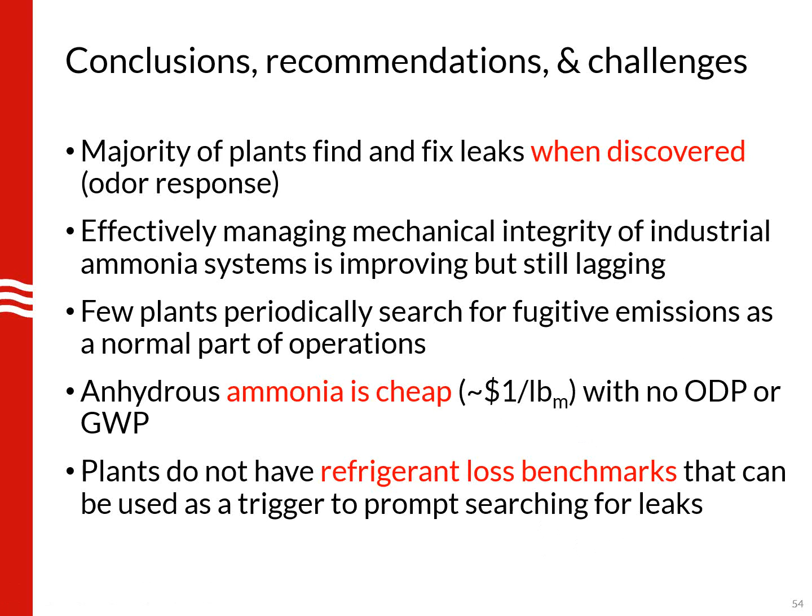And lastly, some plants don't really have this loss benchmark - like, what is a reasonable amount that we should be able to target for our system in order to keep the emissions down below some reasonable level?

So this is a bit of an eye chart. I'm not going to go through this in all sorts of detail, but let's focus on what our recommendation is. Plants really should set a threshold of 5% per year of their system charge, and not to exceed 2,000 pounds a year - a ton of ammonia a year.

Now, you think about that and say, well, gee, that seems like a lot. Well, it depends on how big the system is. If you look at an average size covered process, a 40,000 pound system, 5% losses is exactly 2,000 pounds a year. That's 5.5 pounds per day on average.

And if you looked at the larger end of that spectrum, a 400,000 pound system, if we said limited to 5%, all of a sudden you're at 20,000 pounds a year. Wow, that's a lot - that's 55 pounds a day. So that's not really reasonable.

So you have to look at the scale of this infrastructure and block things a little bit, not just say go on a percentage and, hey, 20,000 pounds a year is what we need. I think we can do better than that. So some of this is really setting an initial percentage of the system charge and then setting an upper limit as a target to maintain.

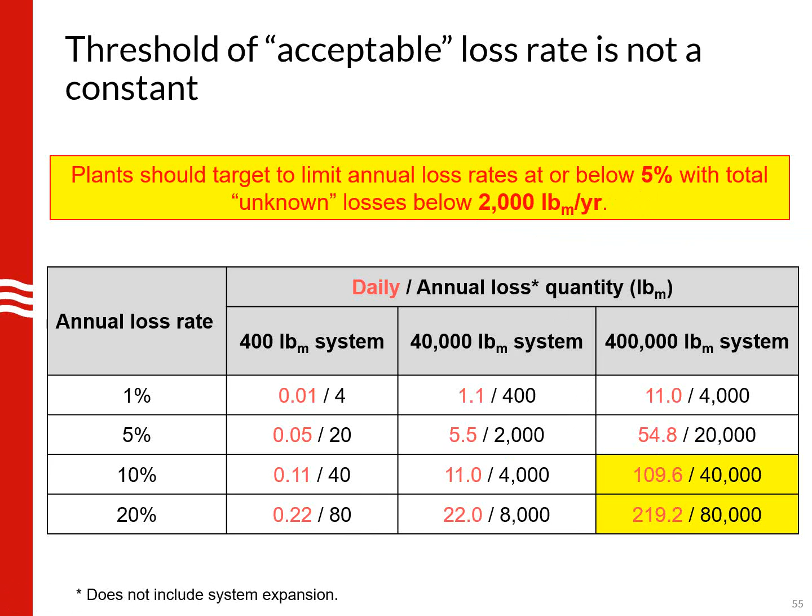And so they're not too different than what we saw in the field and what we've checked in with other end users where they're at and the quantities they're consuming as a percentage of their system charge.

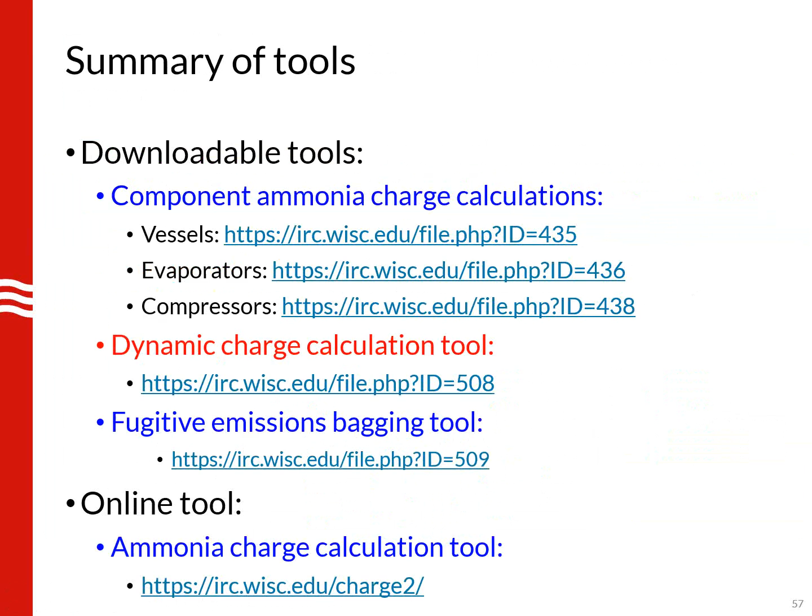Here's a summary of the tools available to you as a conclusion of this project. Mark didn't talk about the bagging tool, but that is a tool that you can actually calculate the fugitive emissions if you apply this bagging technique, which is covered in more detail in terms of how-tos in the guidance document. I also want to make sure you're aware there are some resources related to ammonia refrigeration to point you to.

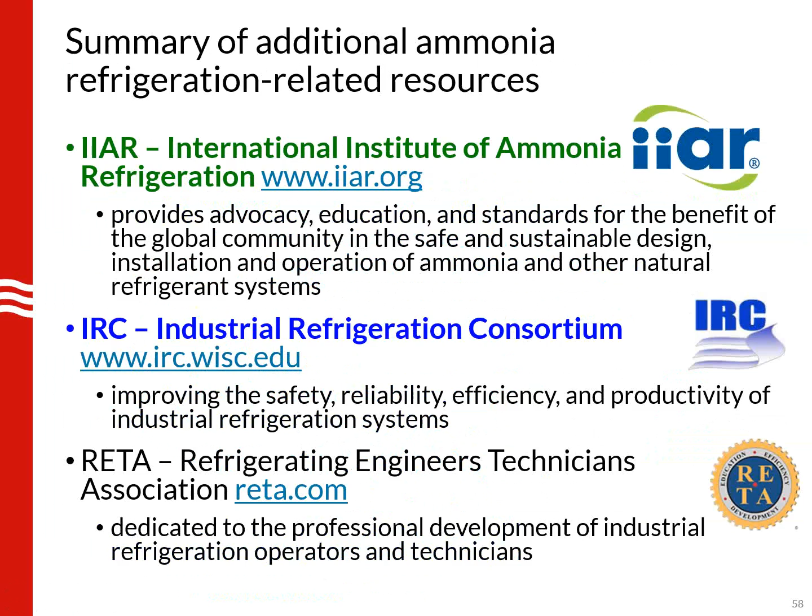The International Institute of Ammonia Refrigeration is a great resource. They publish a suite of standards that apply to this technology, have an annual conference, and education programs, so really a great resource for the industry. Here at the UW, we have the Industrial Refrigeration Consortium. We maintain a website and staff, and we're engaged primarily with end users, and for technicians, to get them education and training. It's just another network of resources available for helping staff and facilities further their knowledge, skill, and capabilities.

So with that, I will stop here and let's see what we have for questions.

First question: was ammonia loss during oil pot draining determined? As part of this project, we looked at oil pots a little bit. We don't think it's large. The amount of ammonia actually dissolved in the oil is quite low, but we weren't able to get measurements of that. If you're bringing out flowing vapor ammonia or liquid ammonia as part of your oil draining, that's a little different. But if all of the liquid ammonia is boiled off and the oil pot is isolated, it's likely just fractions of a pound. It makes a huge odor when you drain oil, but it takes so little ammonia to make that big odor. It's probably very small, but no, we weren't able to measure it.

Next question: in regards to quantifying accidental ammonia releases, do we offer tools for release calculations? There are two papers published by Doug and Todd through IIAR, and if you want to look at the guidance document, those papers are referenced there. They go through in pretty good detail on how to calculate the quantities of ammonia released during an incident.